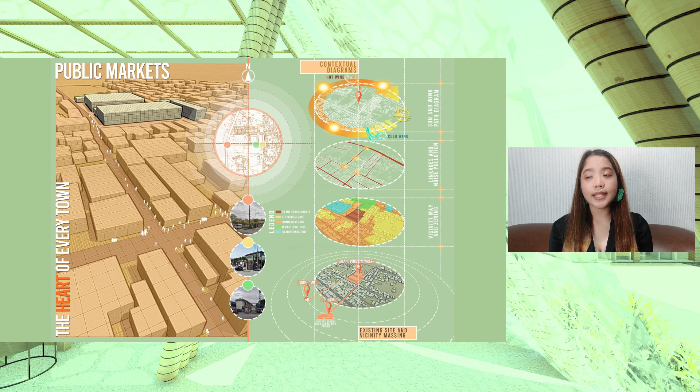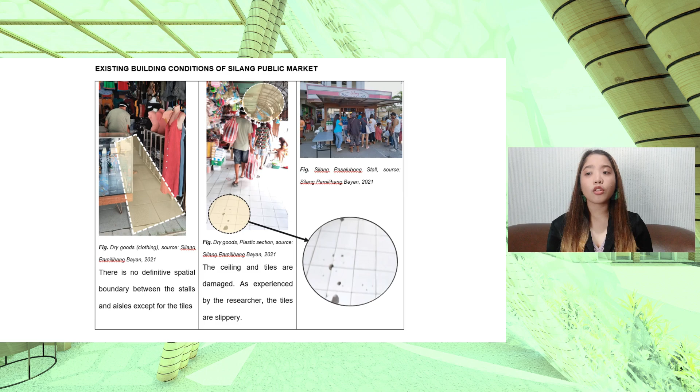Silang Public Market consists of over 740 market stalls, and as observed, most of these are unmaintained, old, and located at poor visibility to the consumers. The main buildings are congested, resulting in inefficient circulation, and it lacks visual cues for wayfinding.

There are many reasons why people go to a public market. Through the findings in the study, experiences are not usually heightened because of how the space is structured. Palenques should fulfill both the needs and wants of the community. The Silang public market reflects the cultural identity of the town. How can public markets showcase a cultural sense of enrichment?

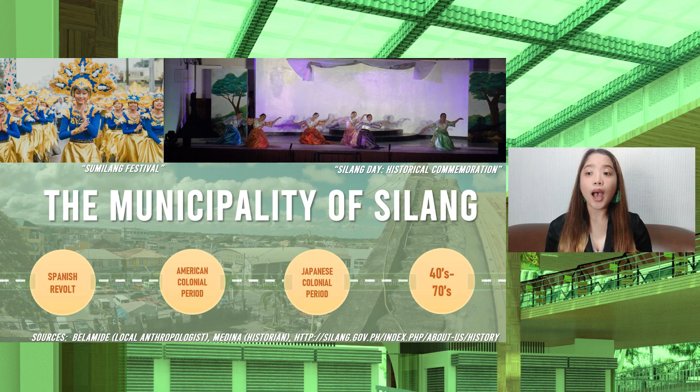Silang, a first-class municipality, is believed to be one of the oldest towns in Cavite, and with its historical background from the Spanish Revolt up to this present day, agriculture has been the primary economy that sustained the life of the Silangeños. Corn, coffee, pineapple, to name a few of its primary crops, and together with other local products, will be integrated in order to market them in the proposed development through social architecture.

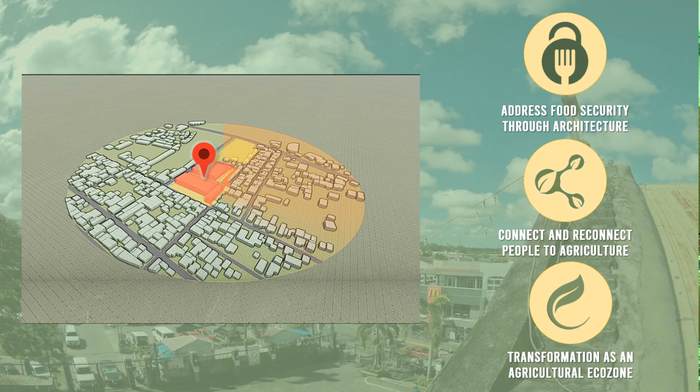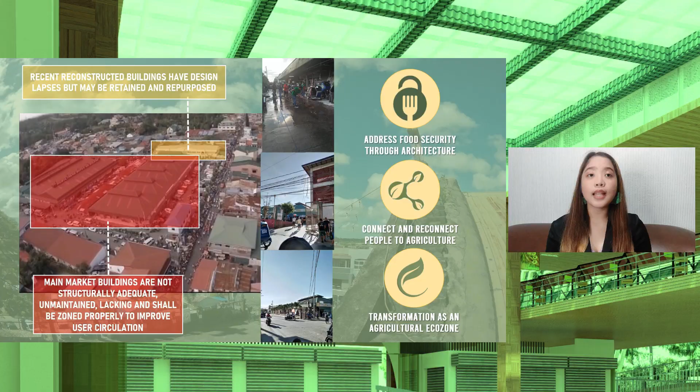Silang public market can be of great potential in addressing food security through architecture, connecting people to agriculture, and transforming as an agricultural ecozone. Old market buildings shall be demolished due to structural inadequacy and other conditions, while some buildings may be retained and repurposed for the project, entitled Silang Socio-Civic Multiplex: the revitalization of Silang public market through the synthesis of placemaking, which facilitates creative patterns of use and the sense of place, and multiculturalism, which nurtures existing distinctive qualities and resources.

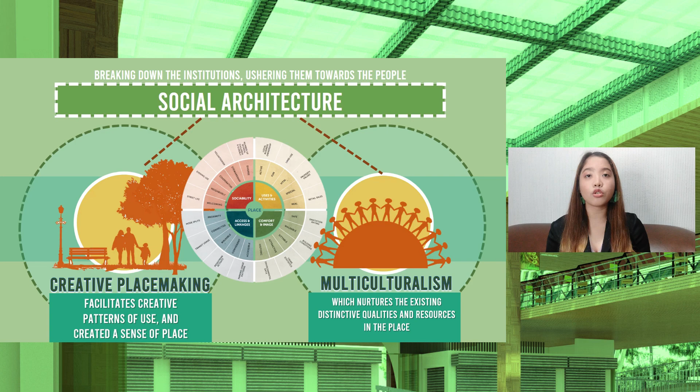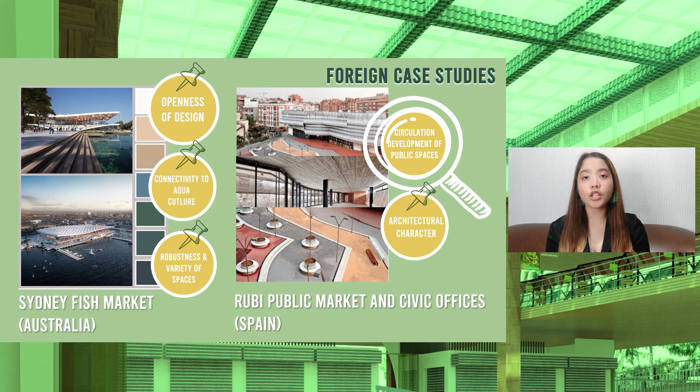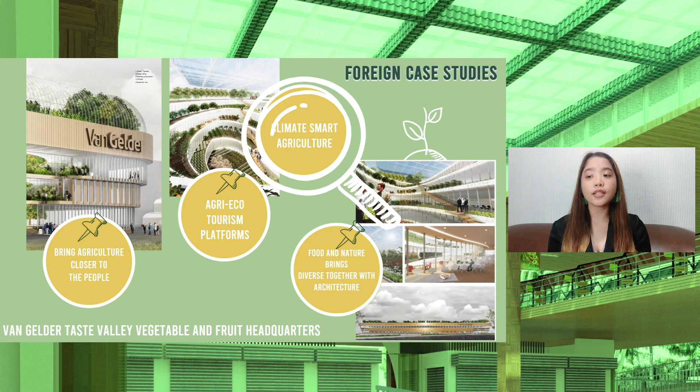A comparative analysis of case studies has been conducted to assess the best and least applicable for the project. For the foreign case studies: number 1, Sydney Fish Market in Australia, achieved robustness and variety in its spaces. For the second one, the Rubi Public Market and Civic Offices in Spain, the design achieved efficient circulation and spatial distribution. Aside from those typologies, Van Gelder Taste Valley Vegetable and Fruit Headquarters showcases the connection of humans with agriculture and nature through architecture.

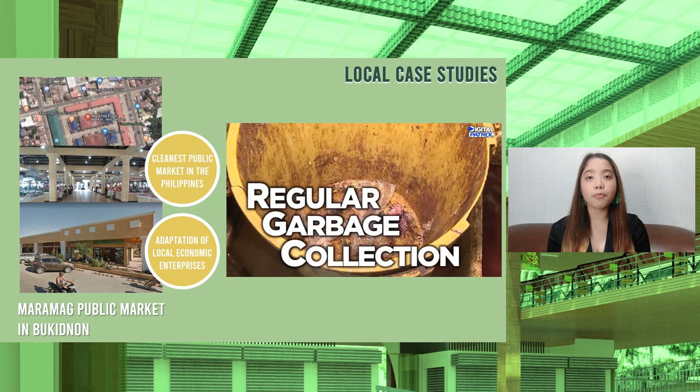Assessing the successful exhibits of local public markets in the Philippines, Maramag Public Market in Bukidnon has been considered the cleanest public market and also adapted local economic enterprises. Lastly, the most applicable for the project, Palo Public Market in Leyte, which utilized the courtyard design as an active park and public space. Its design was able to achieve improved accessibility and sense of place.

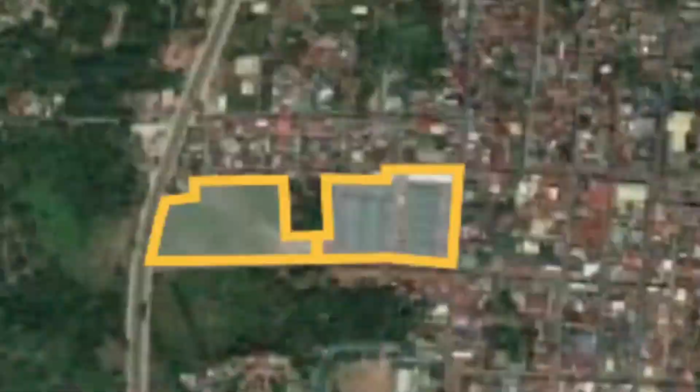According to the FAO-UN, it is still essential to evaluate other locations aside from the existing sites subjected for redevelopment. Evaluating the three options with the formulated site criteria, the existing site and the second option, which is adjacent, have approximate results leading to a lot expansion.

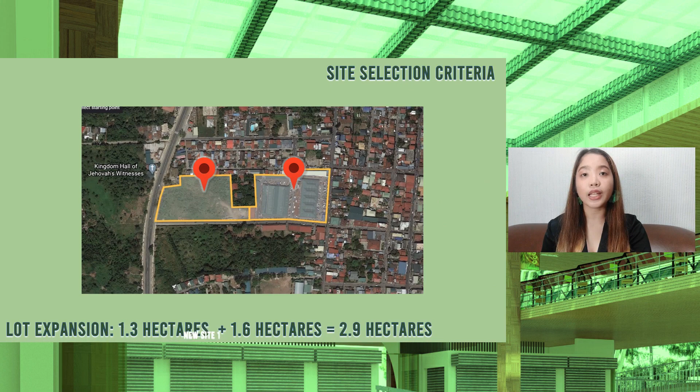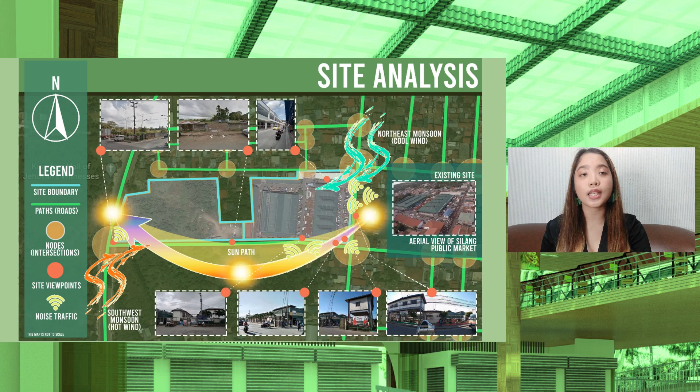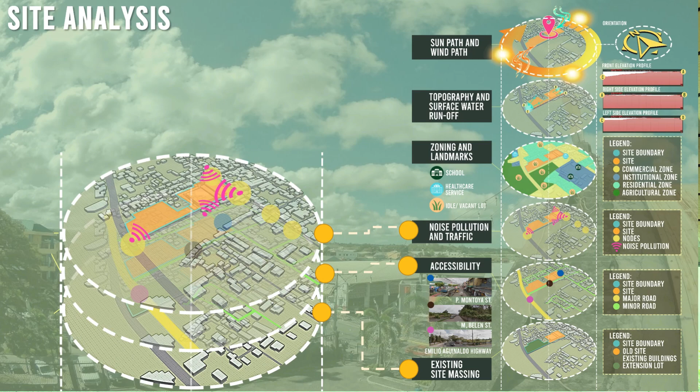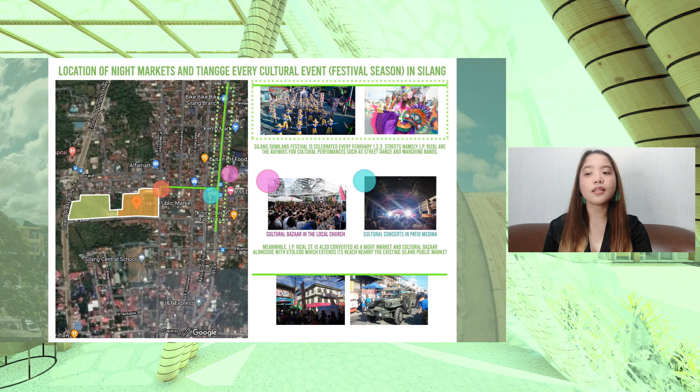The site is highly accessible by major and minor roads leading to strategic drop-off points. Due to the prevalence of noise pollution and traffic, sound simulating plants and landscape open space will also function as density alleviation and may be designed as a location for night markets during cultural celebrations in Silang, also called the Tiangge. The zoning and landmarks also identify the potential users of the project.

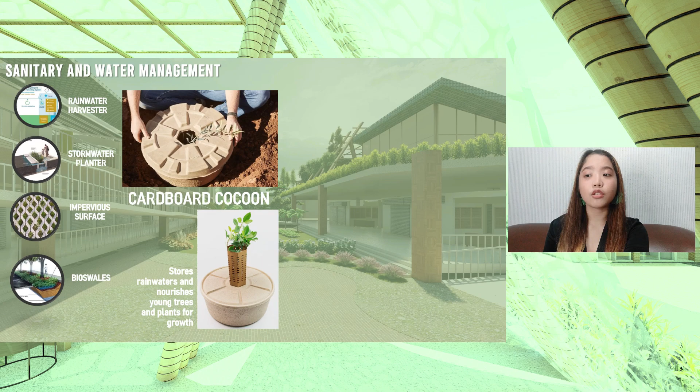As for the topography and surface water runoff, the site is not flood prone but will adapt different strategies to utilize rainwater, such as stormwater planters and impervious surfaces.

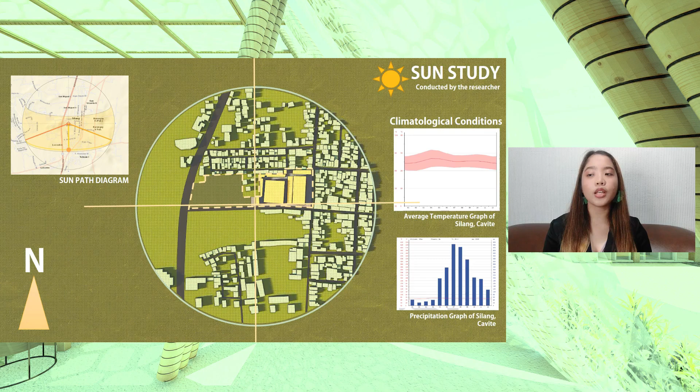This is the sun and wind path analysis, which also has been a primary consideration in situating the urban beekeeping, which is advised to be located in a dry, quiet, sunny area of the property facing in a northeasterly direction.

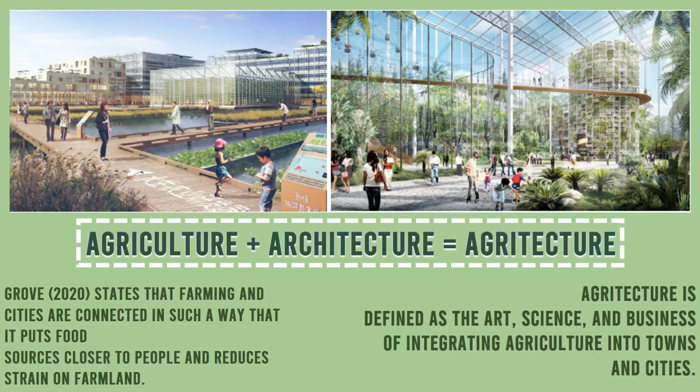Urban beekeeping functions as assistant pollinators to flowers, crops, and plants. This strategy integrated in the project supports the economic concept, complying to the standards of agricultural tourism, intersecting to the strive of Silang to be a garden capital.

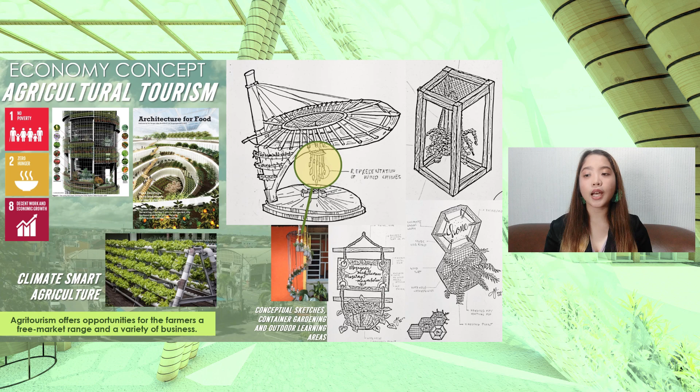Edible gardens, garden-to-table approach in a community restaurant, and urban farming will be encouraged in the development. In line with this, a crop diversification tactic under climate-smart agriculture will be applied through long-term, short-term, and disaster-resilient crops.

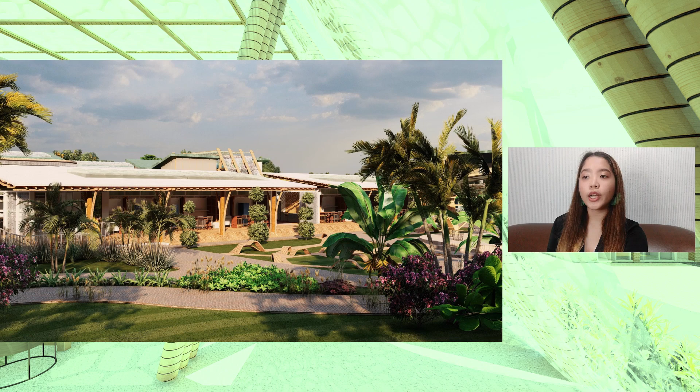There will also be outdoor and indoor workshop areas, livelihood and learning spaces that will educate the localities about the mentioned agricultural practices. People make places.

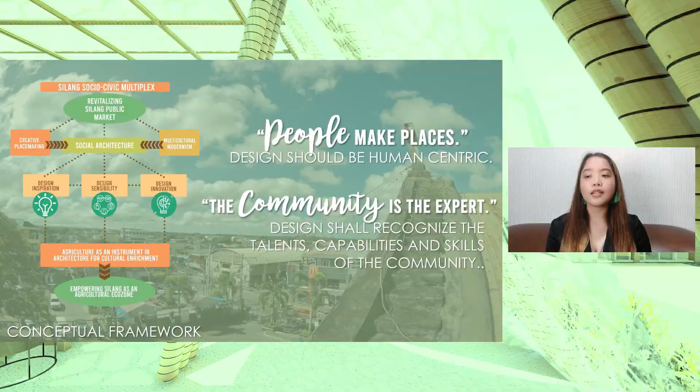Developing the design conceptual framework, the revitalization applies design inspiration, design sensibility, and design innovation. These are the building systems that will be adapted in the project.

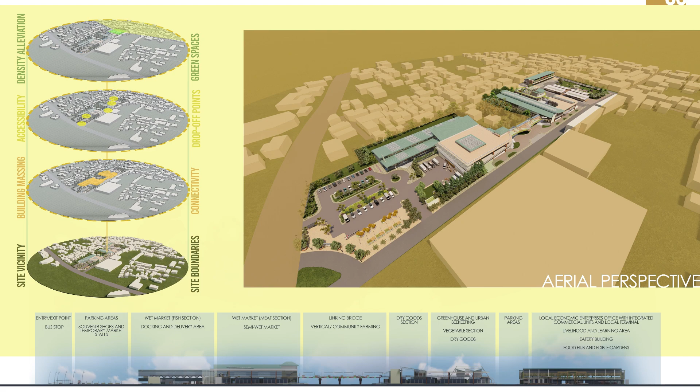Discussing its functionality, a hierarchy from the most to least essential goods have been classified for the major considerations under the space planning of the building. This is based from the given market sectioning of goods given by the market admin.

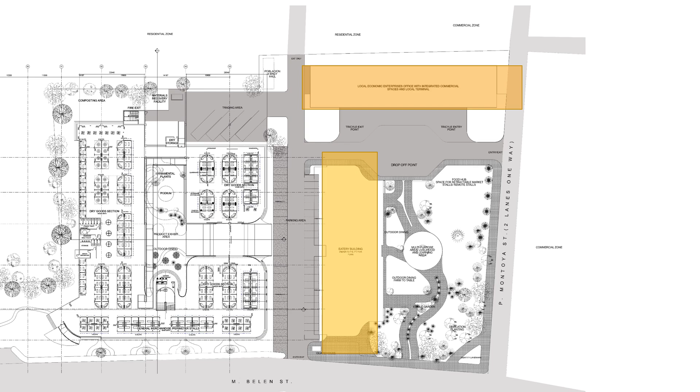In the eastern section is where most of the consumers will originate, assessing their walk paths and local transportation routes, meaning this is where the Department of Local Economic Enterprises will also be located.

As mentioned, open space functions as density alleviation, but at the same time, there will be a focal point that will show connection of both indoor and outdoor activities.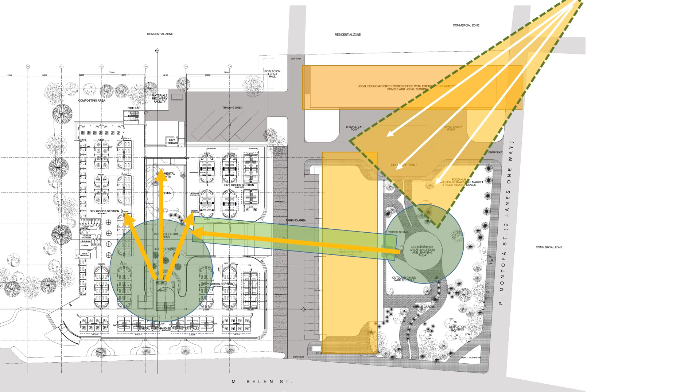This area will mainly be strategized as a food hub, leading to a narrative towards the courtyard of the adjacent building to highlight the garden, restaurant, and ornamental plants.

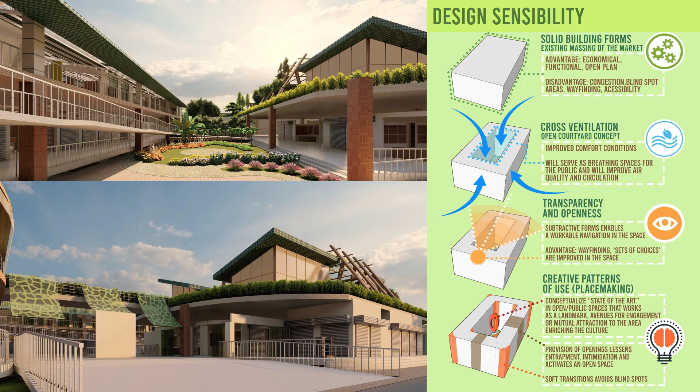Courtyard concepts have been applied for easier navigation of zones and spaces. The curvature also improves the visual weight and visibility.

Proceeding to the western zone of the development is where the goods of the higher frequency are located, such as the wet market, fruits, vegetables, rice, eggs, and dried fish.

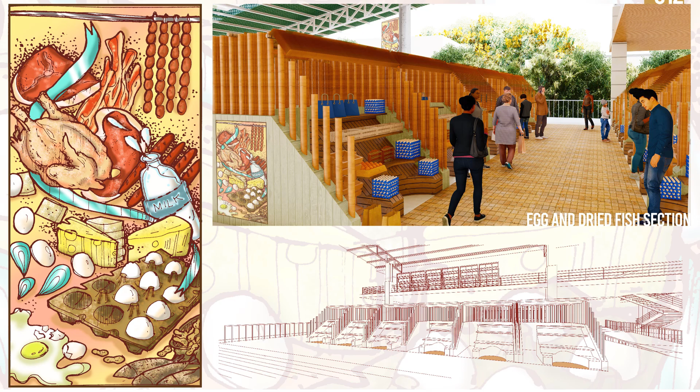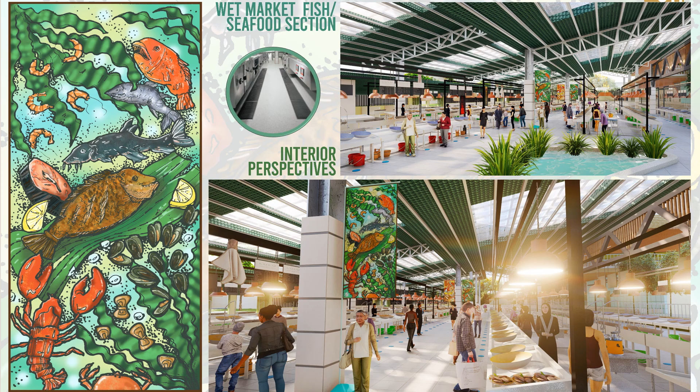As a strategy, adequate visual markers, drainage, and non-skid tiles should be applied to improve the wet market. As for the olfactory comfort, an openness for natural ventilation, large setbacks, and buffers to avoid disturbance in adjacent developments are being provided. Proceeding to the second level of the main building is where the fruits and vegetables are located.

In order to be connected to the agricultural related practice, which is the urban beekeeping, located in the northeastern roof deck.

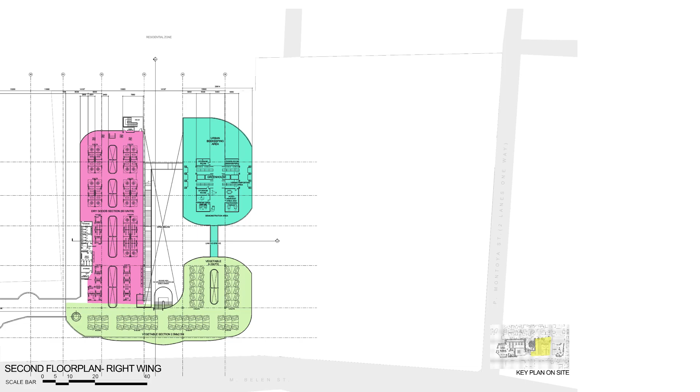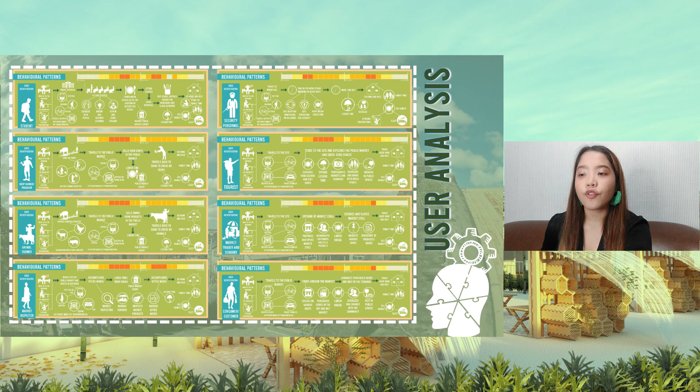Upon conducting a behavioral analysis of the users, different planning strategies have been adopted, such as the existing practice of stall sharing has also been put into consideration.

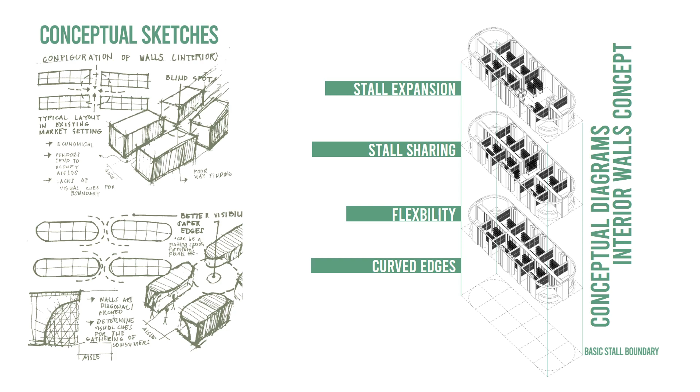Interior walls of building will be designed for better visibility and safer edges, avoiding blind spots, which are currently adapted in a typical market setting.

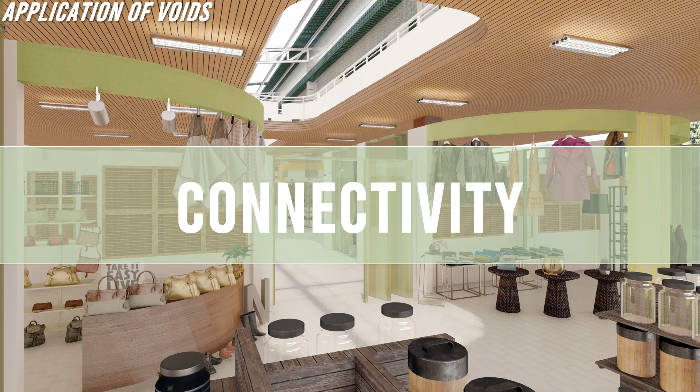Voids also help improve the ventilation, circulation, visibility, navigation of various market stalls, since it enables connectivity between two different levels. Also, to improve the flow, curved voids are applied to stalls to be more inviting to the user and at the same time lessens the traffic in the aisles.

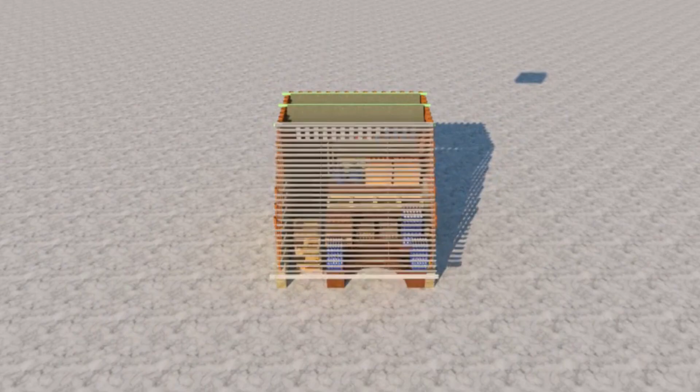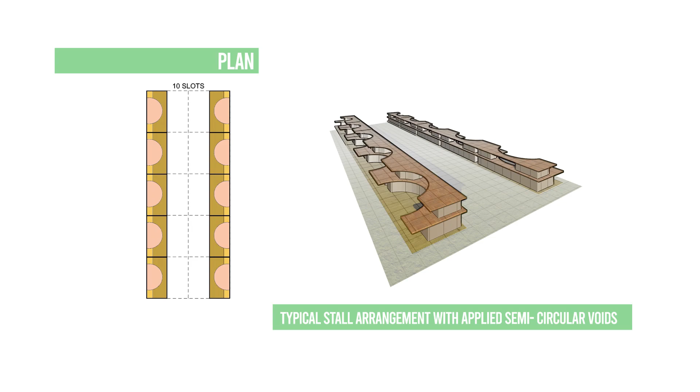This is a conceptual configuration of a market stall specifically applied in both the fruits and vegetable sections. From a typical monotonous layout, there comes an applied informal pattern with curved voids.

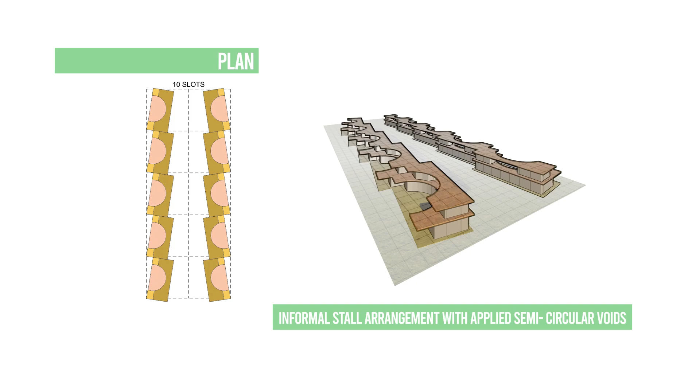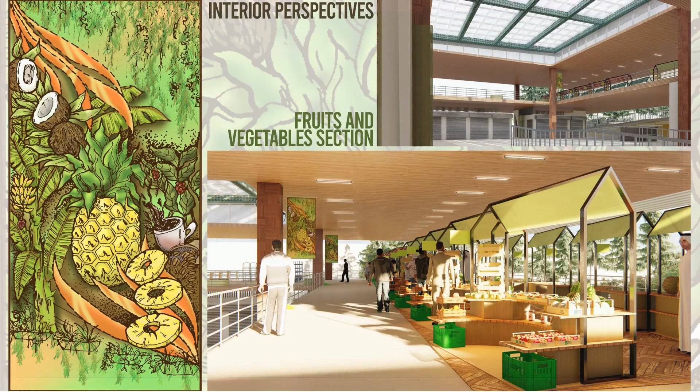Achieving multiculturalism, vendors may have their own sense of personalization in their market space. The concept considers the existing social context on how vendors interact with the consumers. Thus, the said informal layout shows an improved product visibility and visual cue for navigating a specific stall.

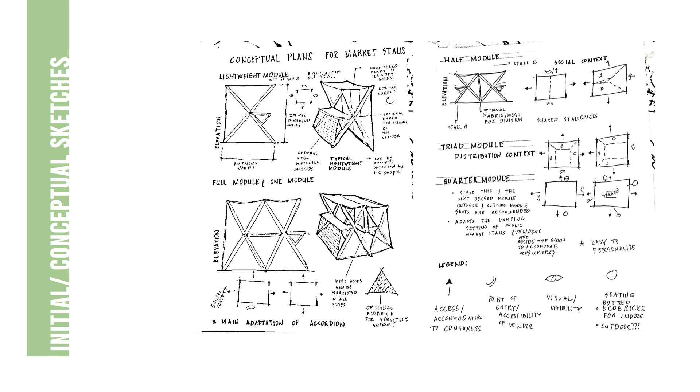The concept of flexibility for temporary market stalls derived from case studies, from a lightweight module through an accordion mechanism, a full module, half, triad, and a quarter module, which puts into account existing behaviors.

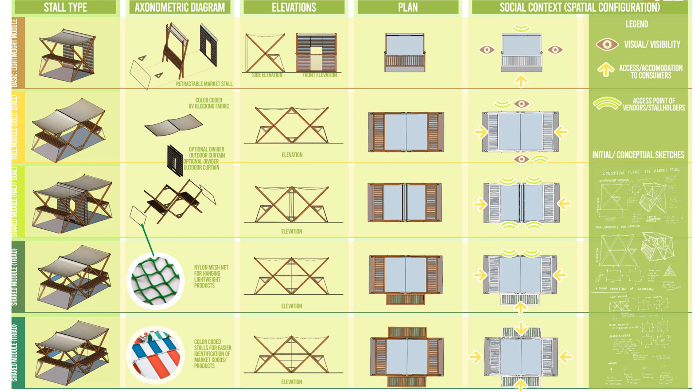For example, for the quarter module, in a selected setting, there are vendors who prefer to stay beside their goods, outside their stall, and socialize with other vendors.

Each color-coded module has a social distribution context and how will be the accommodation of consumers, visibility for the marketing of products, and point of accessibility of the vendors.

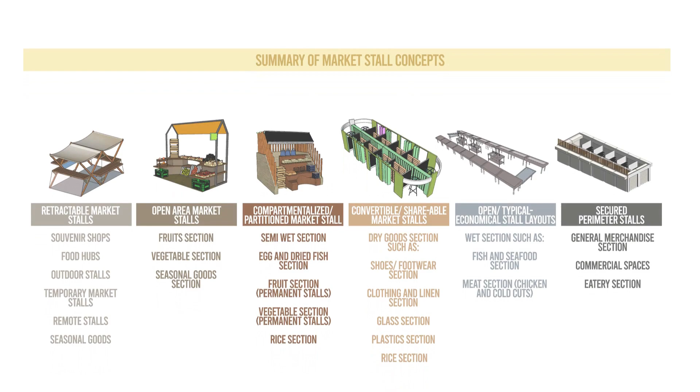For indoor furniture, an eco-brick bottle chair enables the primary users to compress their trash and repurpose. This is under the sustainability concept, which is a socially engaging waste management.

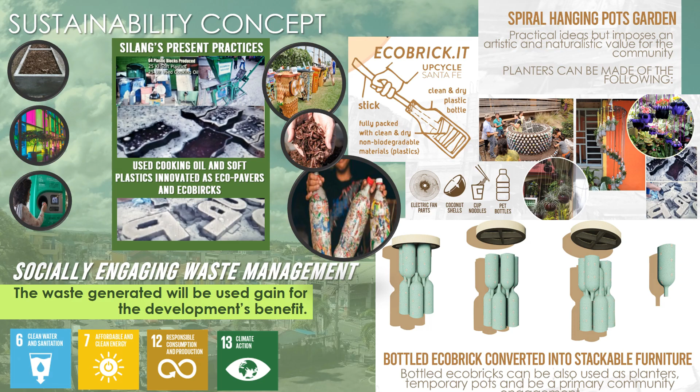Waste depository areas and materials recovery facility are distributed in every market zone. Aside from including vermicomposting, the project will also include a recent invention that can be an alternative energy source, the Aureus solar window, which utilizes fruit and vegetable compost.

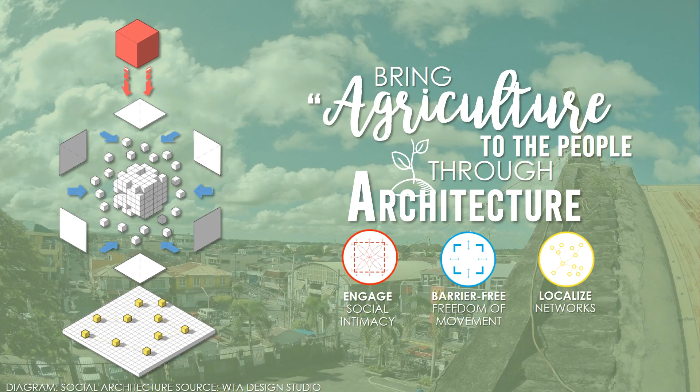Culture shapes architecture. It can be learned, shared, or integrated. And with these characteristics, it is now time to bring agriculture closer to the people and create a socially connected perception towards the visual space, a key concept of the project that will heighten the public market experience.

This concludes the overview presentation.